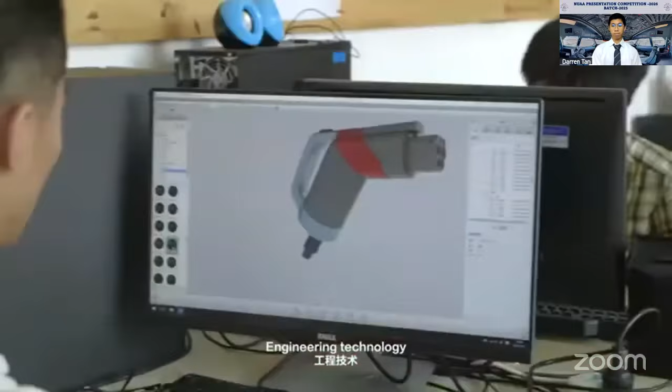NUAA is one of China's premier research-oriented comprehensive universities, which enjoys multiple disciplines in engineering technology, natural sciences, social sciences, business, and management. Established in 1952, NUAA strives to conduct world-level research and education with an emphasis on aerospace technology.

Our curriculum represents a strong capacity among all the universities in China. NUAA offers the widest range of programs of any university in China, with 54 undergraduate programs, 200 postgraduate programs, and 16 postdoctoral stations. With a total of 28,000 full-time students, we have a 2-to-1 ratio of undergraduate to postgraduate students.

With an annual research budget of $150 million US, our size and history allows a breadth of research activity that can be matched by few universities in China. We take a coordinated approach through our Research Institute to enable the best minds to work together on exciting new areas of study and discovery.

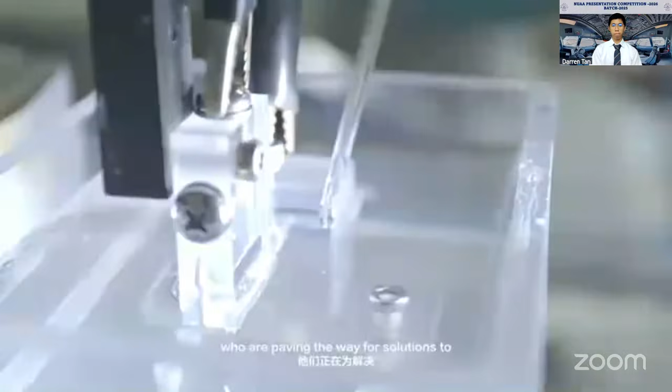Our faculty are comprised of teachers, researchers, and scientists who are paving the way for solutions to complex global issues impacting our environment, technology, and future.

NUAA has 2 campuses located 12 kilometers apart. Our Minggugong campus is situated in the very ruins of the Ming Dynasty Palace, and our Jiangning campus is located in a picturesque university town. Both campuses are easily connected by shuttle bus and metro.

NUAA first welcomed international students in 2005. 1,300 students from more than 90 countries are currently pursuing different degrees and non-degree programs at NUAA. Our alumni have gone on to work for different Fortune 500 companies in China and abroad.

5 undergraduate programs that are offered in English include aeronautical engineering, mechanical engineering, electronics and electrical engineering, software engineering and management, and international business. International students can choose various non-degree programs, including our Chinese language program, foundation program, summer innovation

projects, and joint research projects with Chinese students. Students at NUAA have access to all the world-class infrastructure one comes to expect from a premier university, including an extensive library and international student dormitory, health services at our hospital, a state-of-the-art sports center with a swimming pool, not to mention supermarkets, canteens, cafes, and much more.

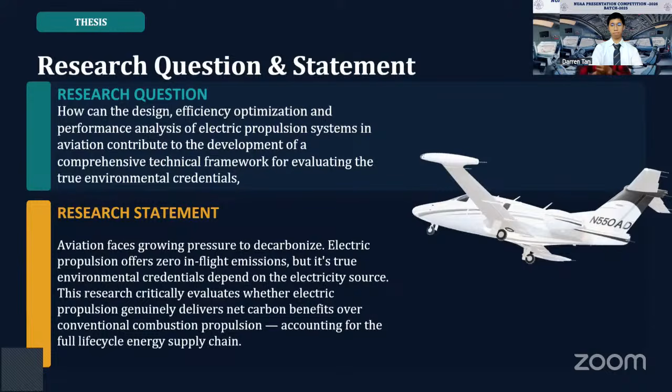Our research statement is: aviation faces growing pressure to decarbonize. Electric propulsion offers zero in-flight emissions, but its true environmental credentials depend on the electricity source. The research critically evaluates whether electric propulsion genuinely delivers net carbon benefits over conventional combustion propulsion, accounting for the full life cycle energy supply chain.

Next, we have the design of electric propulsion systems. We will go through the system architecture, motor and battery, thermal management, and safety certifications.

Next is the fundamentals of electric propulsion systems, that is, all-electric, hybrid-electric, and turbo-electric. Let me give a brief insight about how these three work.

We have three motor types: BLDC motor, PMSM motor, and induction motor. Each has efficiency of around 90 to 95%, 95 to 98%, and 85 to 92% respectively. The BLDC has medium power and the induction motor has moderate power, but the PMSM motor type has the highest power density. The BLDC motor is best used in small UAVs and light aircraft. The PMSM motor is for medium-large electric aircraft, and the induction motor is best used for cost-sensitive applications.

Next, we have core performance analysis, starting with range. We have calculated range on electric aircraft using a formula: battery energy multiplied by efficiency multiplied by the lift-to-drag ratio, divided by maximum takeoff weight. Next we have endurance.

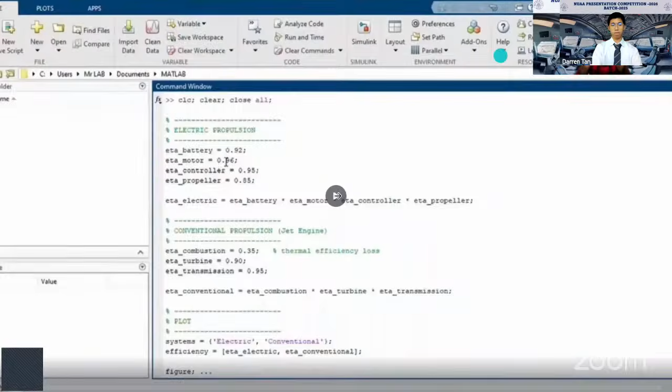Let's take the electrical propulsion. First, we model the electrical propulsion system, and each component represents a real energy conversion stage. Taking the battery as an example, before it can work, it converts chemical energy to electrical energy, losing around 0.08 of its energy, giving an efficiency of 0.92.

For the motor too, it converts electrical to mechanical energy, producing an efficiency of 0.96. The controller too has an efficiency of 0.95 because of power regulation losses. The propeller has an efficiency of 0.85 because it converts mechanical energy to thrust.

Now let's take the conventional propulsion too. The same thing happens during combustion. We have thermal efficiency losses which account for around 0.65, giving a combustion efficiency of around 0.35, a turbine efficiency of 0.9, and a transmission efficiency of 0.95. This formula is used to calculate the overall efficiency of each type of propulsion.

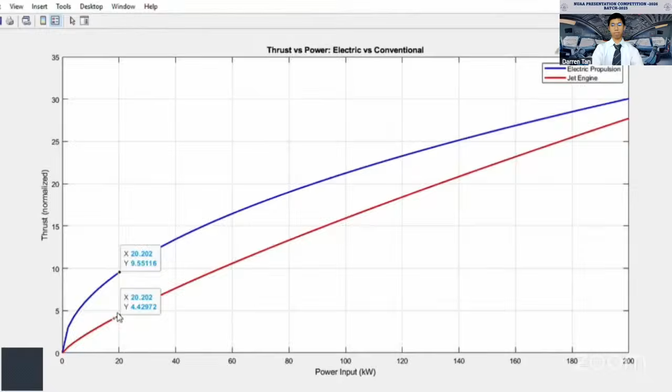This is our final simulation. Here we analyze the mission profile behavior of an electric aircraft. Our case study was the NASA X-57, and we compared it with the commercial or conventional traditional aircraft.

Unlike our previous simulation, which focused on efficiency of thrust, this model focuses on how propulsion systems behave across different flight phases. We define the time from 0 to 10 seconds, representing a simplified mission timeline where different flight phases occur at different time intervals. Let's run this code to see what we get.

All right, thank you. Now let's move forward to our efficiency analysis for our thesis. We have the total system efficiency formula: efficiency of the battery times efficiency of the controller times efficiency of the motor times efficiency of the propeller. So we have the following results.

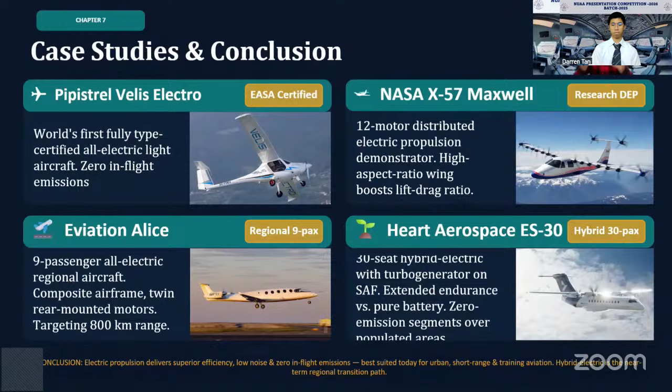So the conclusion is electric propulsion delivers superior efficiency, low noise and zero in-flight emissions. It is best suited for today's urban, short-range and training aviation. Hybrid electric is the near-term regional transition path.

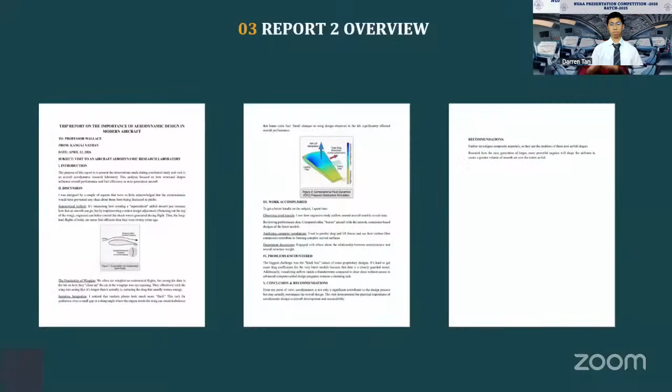Next, we have our second report. The topic of our second report was noise reduction and thrust optimization of electro-aerodynamic propulsion for silent drones. Here we have our report, made by another member. Next, we have another report. And now we have the academic essay that we wrote in collaboration. The topic was the role of education in personal and social development. Here we have our essay

and references. Next, we have the professional profiles for Group 12. Here we have the CV for our team leader. Next, the CV for our deputy team leader. And then we have the CVs for our members. Next is the professional profiles for Group 12, that is the cover letters.

So let me explain in brief how our team has been doing. Our team leader is more focused on strategy and the future, and one of our members is engineering focused. Another is performance driven, another is organized and thorough, another is analytical and detail oriented, another is analytical and curious, another is creative and collaborative. Here we have our cover letters for our different team members.

Okay, thank you. And now we have the questionnaire results that we did in the first few weeks of our course. This is the summary of our group. We took the help of AI to shape this illustrative analysis of our group questionnaire results. Now we have a miscellaneous overview of how our meeting minutes were prepared by our deputy team leader, and some social media portfolio. This is an example from one of our team members.

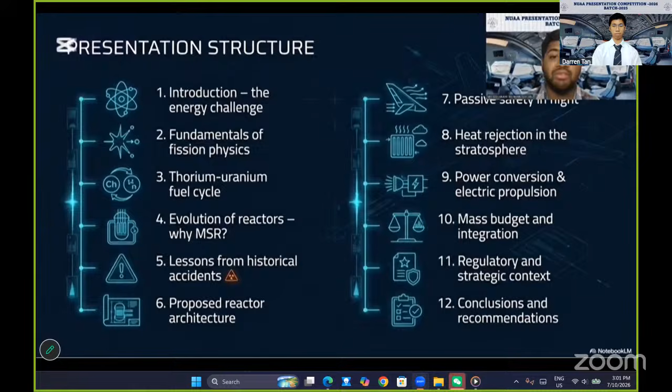Next, we will examine the evolution of reactor architecture and explain why the molten salt reactor is the only suitable solution. We will then present the lessons learned from historical nuclear accidents, a crucial part of our work because it shows which designs are dangerous and why. After that, we will present our proposed reactor architecture and discuss passive safety under flight dynamics. We will then cover power conversion and electric propulsion, present our mass budget and discuss the regulatory and the strategic context. Finally, we will conclude our findings and recommendations. Moving on to the next slide, the abstract.

The problem we address in our thesis is twofold. First, current solar battery systems fundamentally limit the endurance of HAPS platforms. They simply cannot provide the 20 to 100 kilowatts of continuous power required for advanced payloads like radar, communication, and electronic warfare systems.

Second, historical attempts to use solid fuel reactors in aerospace applications have proven catastrophically unsafe, as demonstrated by accidents like SL-1 and Cosmos 954. Our solution is the thorium molten salt reactor, which we establish as the only viable architecture to enable perpetual stratospheric flight. The TMSR addresses both the power and the safety challenges.

To achieve this, we designed the core as a 1 to 2 megawatt thermal single-fluid thermal spectrum reactor using the fuel salt. For safety, it features an inherent passive freeze plug gravity drain that activates within 2 to 5 minutes, along with strong negative reactivity coefficients that ensure stability under flight dynamics.

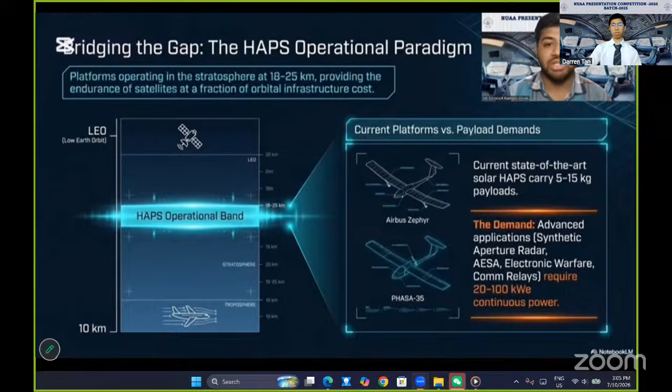These platforms are designed for long-duration missions lasting months or even years, and they provide regional coverage for applications such as communication, radar, electronic warfare, and reconnaissance. The strategic importance of HAPS is that they offer a persistent presence over a specific region, something that satellites cannot provide because they are constantly moving, and something that conventional UAVs cannot provide because they have limited endurance. Going on to the next slide, the stratospheric environment challenges.

However, the stratospheric environment is extremely challenging. At 20 km altitude, the air density is only 7% of the sea level value, just 0.09 kg per cubic meter. The temperature drops to minus 56 degrees Celsius, and the pressure is 5.4% of sea level pressure.

Stratospheric winds can reach speeds of up to 30 meters per second or more, requiring the platform to maintain its position against these winds, a task that requires continuous propulsive power. These extreme conditions mean any power source for a HAPS platform must be lightweight, reliable, and capable of providing continuous power under rigorous environmental conditions. Now, moving on to the next slide, the energy problem, limitations of photovoltaics.

Current HAPS platforms rely on solar power and batteries, but this system has fundamental limitations. First, the diurnal cycle: during the 12 to 14-hour stratospheric night, the platform must rely entirely on the batteries. For a 50 kilowatt platform, this means storing approximately 700 kilowatt hours of energy, requiring over 1,750 kilograms of batteries with current lithium sulfur technology.

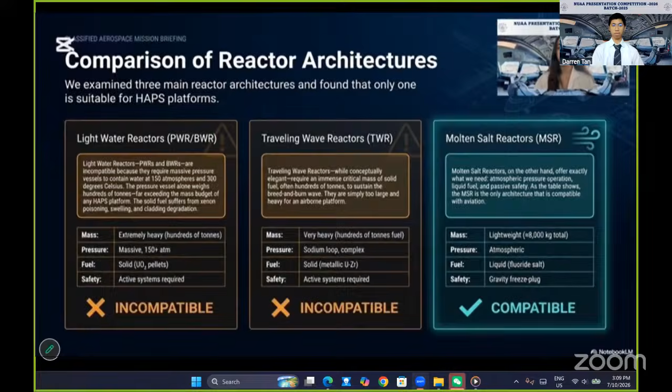Now let's move to the core chemistry, the thorium-uranium cycle. Thorium-232 breeds into thorium-233, then protactinium-233 with a 27-day half-life. Liquid fluoride salt operates at near atmospheric pressure and also allows continuous fission gas removal. Compared to the uranium-plutonium cycle, thorium produces far less long-lived waste, has lower proliferation risk, and enables predictable, autonomous control: cleaner, safer, and more secure.

Now let's move to the geopolitical field: proliferation resistance. Here's the game changer. Thorium burning inevitably produces uranium-232, which emits a hard 2.6 MeV gamma ray. To handle just 5 kilograms of uranium-233, you need 100 kilograms of lead shielding. That intense radiation makes the material impossible to hide, transport, or weaponize without massive remote equipment. It's self-protecting.

And remember from SL-1, a solid fuel reactor that killed 3 people when a single control rod was withdrawn. Solid control rods and pressurized water do not belong in the air. And now let's move to the lessons from history. History teaches us why liquid fuel matters. Goiânia, 1987: 93 grams of cesium-137 abandoned caused a radiological disaster.

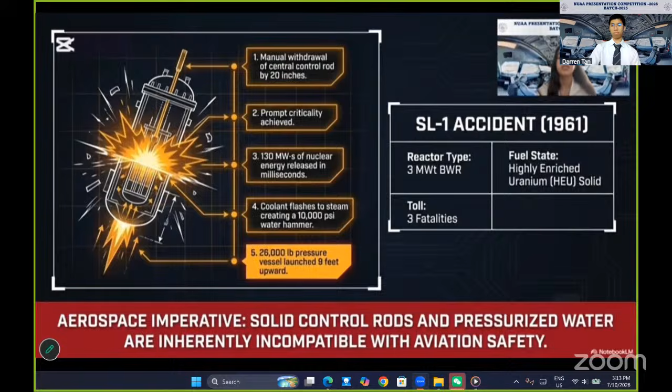And now let's move to the orphan source. 93 grams, that's all it took to create a crisis in Goiânia. If we put reactors in the sky, we must guarantee they cannot become orphan sources. Liquid fuel, chemically stabilized waste, and passive safety are not optional. They are mission critical. So the fission paradigm gives us unprecedented energy density, but only the molten salt reactor with its thorium fuel cycle delivers it safely, securely, and responsibly. Lightweight enough to fly, passive enough to trust, self-protecting enough to deploy anywhere.

For the reactor architecture, we propose a thermal power of 1 to 5 megawatts thermal. The salt is both fuel and carrier. The moderator is nuclear graphite, giving a thermal neutron spectrum, and the operating temperature is 600 to 700 degrees Celsius. We scale this from China's SM-TMSR 400 to our HAPS class reactor.

At this reduced scale, neutron leakage is significant: about 15 to 25% of neutrons leak out of the core. To compensate, we use a beryllium oxide reflector, a higher fissile loading of 10 to 20 kilograms of uranium-233, and an optimized core geometry. The core dimensions are approximately 1 to 1.5 meters in diameter and 1.5 to 2 meters in height. The core assembly mass is 3,000 to 5,000 kilograms.

A critical aspect of our design is passive safety. The MSR has a strong negative temperature coefficient of reactivity, typically -3 to -7 pcm per Kelvin. If the reactor heats up, the fuel salt expands, the fissile density decreases, and reactivity decreases, automatically self-regulating the power output. The safety arises from the physics, not from an active control system. The reactor is inherently stable.

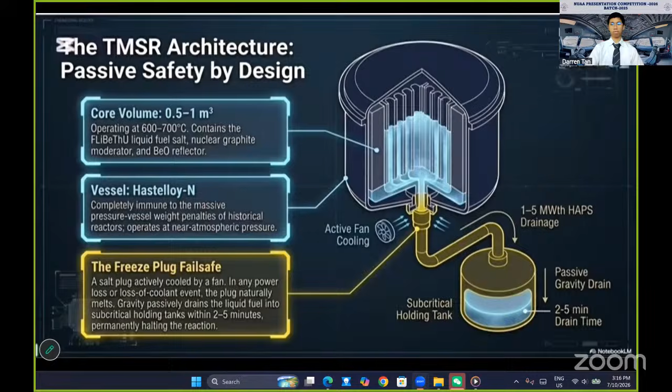A concern for any airborne reactor is how flight dynamics affect reactivity. Our analysis shows that climb and descent have only a small neutronic impact. Atmospheric gusts and turbulence could cause sloshing of the liquid fuel or flexure of the graphite moderator, but our analysis shows that reactivity perturbations are less than 1 pcm for typical gust loads.

In the case of accidents, during the first 5 minutes, the freeze plug melts, the salt drains to the tank, and decay heat is removed passively during descent. A multilayer honeycomb limits the kinetic energy of the impact. After the impact, the fuel salt solidifies below 460 degrees Celsius into a stable state.

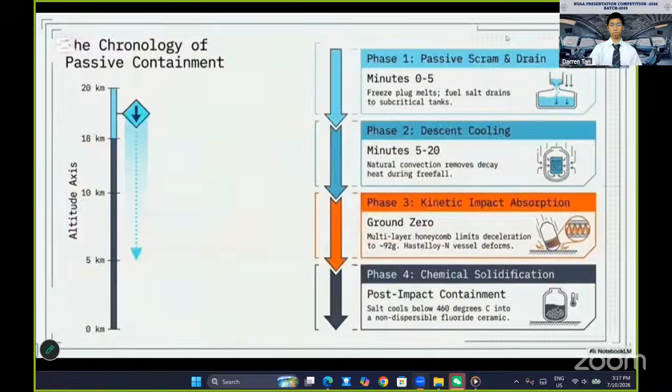Heat rejection at 20 km altitude presents a fundamental challenge. Air density is only 7% of its sea level value, which reduces convection heat transfer to just 15 to 20% of its sea level value.

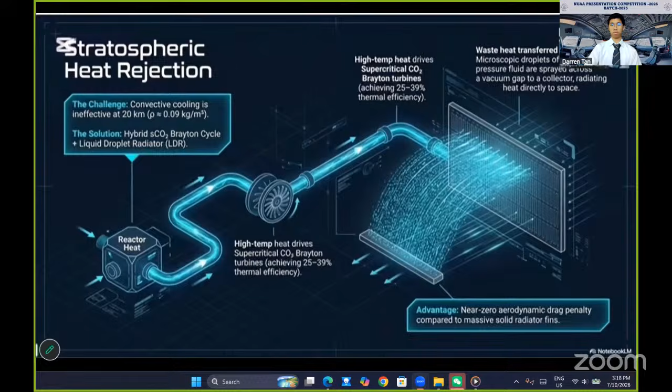The solution is the liquid droplet radiator. The working fluid is projected as a sheet of fine droplets that radiate heat directly to the cold sky with an effective temperature of 200 to 220 kelvins.

For power conversion, we selected the supercritical CO2 Brayton cycle. It operates with carbon dioxide above its critical point of 31.1 degrees Celsius and 7.38 megapascals. The efficiency is 25 to 39% at our operating temperature, and the turbomachine is extremely compact.

Our comprehensive mass budget gives a total system mass of approximately 8,210 kilograms. The reactor core is the dominant mass, accounting for 4,000 kilograms. The shadow shield is 1,200 kilograms. The CO2 power conversion system is 800 kilograms. The airframe reinforcement is 700 kilograms. The thermal management system is 500 kilograms.

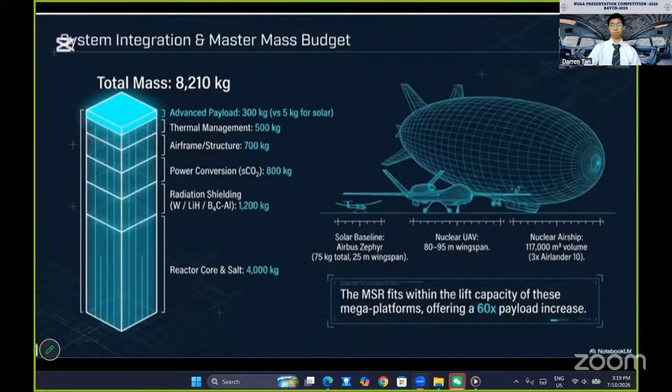The strategic context is very important. China's investment in thorium MSR technology exceeds 12 billion yuan, with an additional 45 billion yuan in industrial investments. The 2 megawatt thorium TMSR-LF1 in Gansu is the world's first operational thorium MSR. In November 2025, China achieved the world's first thorium to uranium nuclear fuel conversion. I would like to present a video about the thorium reactor.

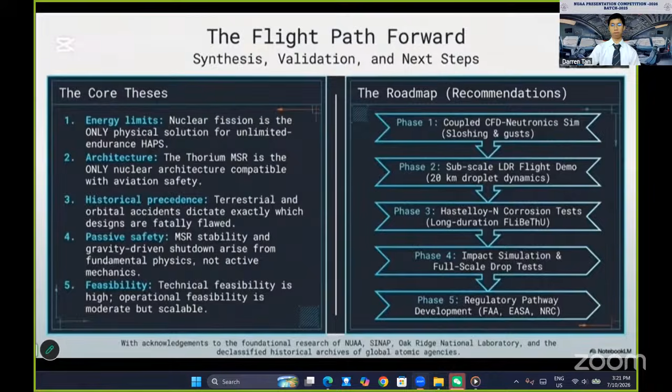Let me conclude by summarizing our main findings. Nuclear fission is the only physical solution to unlimited endurance HAPS. The thorium MSR is the only nuclear architecture compatible with aviation safety. Terrestrial and orbital accidents dictate exactly which designs are fatally flawed. MSR stability and gravity-driven shutdown arise from fundamental physics, not active mechanics. Technical feasibility is high, operational feasibility is moderate, but scalable.

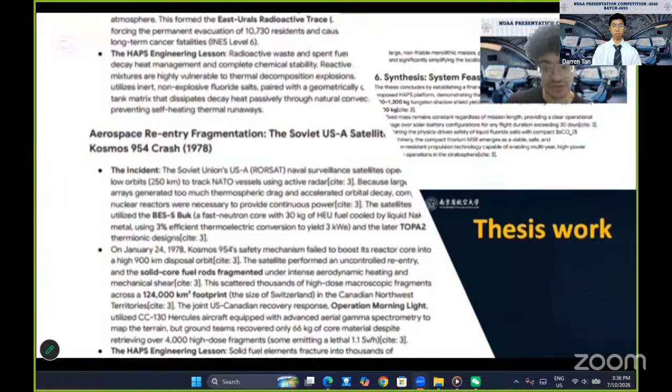An impressive exploration of a bold and innovative concept. Thank you to Group 13 for expanding our perspective on future aerospace technologies. To our judges, you may now begin your evaluation, and audience members, don't forget to vote if you enjoyed the presentation of Group 13.

Moving on, we are pleased to invite Group 14 with their thesis titled Impact of the Next Generation of Smart Suspension Systems for Automobiles. From improving passenger comfort to enhancing vehicle stability and safety, smart suspension technology is changing the way we experience road transportation. This research examines how these advanced systems could shape the future of automobiles, as innovation isn't only about speed, but also about being smarter, safer, and more comfortable journeys. Please give a warm welcome to Group 14.

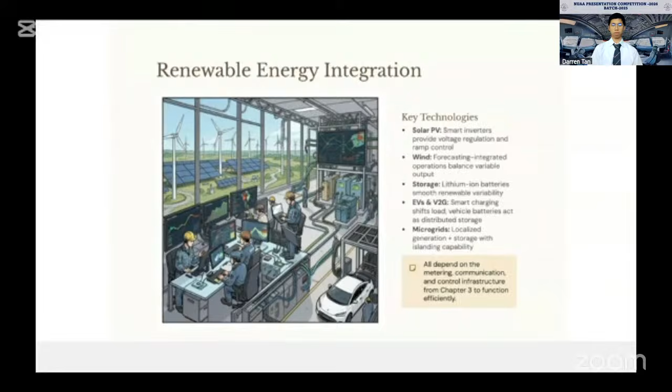Demand response programs can reduce peak electricity demand by approximately 15%. Smart grid projects may also reduce outage duration by around 32%.

Consumer benefits and engagement: smart grids give consumers more information and greater control over electricity use. Real-time data and flexible pricing can help users move their electricity consumption to cheaper off-peak hours.

Automated fault detection improves reliability and reduces the number and duration of power outages. Consumers can also monitor and manage their energy use through smart meters and connected applications. Smart grids also support rooftop solar energy, electric vehicle charging, demand response programs, and other modern energy systems.

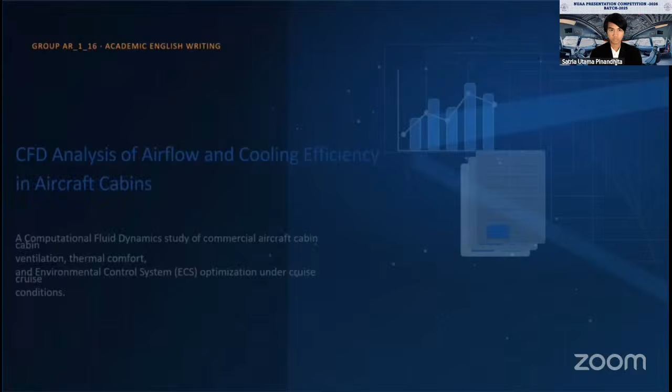Slide 66. Now we begin introducing our thesis, which is titled CFD Analysis of Airflow and Cooling Efficiency in Aircraft Cabins. This research studies how computational fluid dynamics can be used to improve aircraft cabin ventilation and passenger comfort. Slide 67 explains our research statement and research question. Our goal was to investigate airflow distribution, cooling efficiency, and thermal comfort inside aircraft cabins.

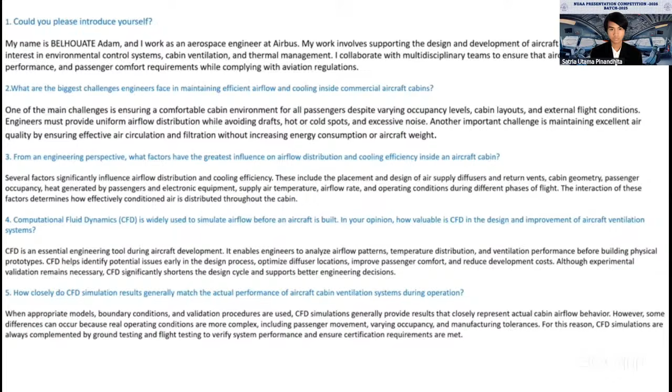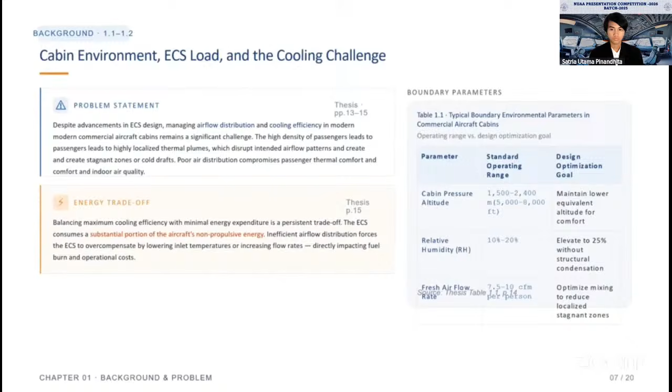Hello everyone, hello teacher. I'm Blessing from group 16 and I'm gonna present the thesis objective and scope. Our objective was to use CFD to model, evaluate, and optimize cabin airflow and cooling. We built a 3D cabin section with human mannequins as heat sources and simulated airflow and temperature under cruise conditions to find stagnant or uncomfortable zones. The scope was a twin-aisle cabin section, steady state, and incompressible, using RANS turbulence models, excluding taxi, takeoff, landing, and structural effects.

Our second part, we talk about thesis organization. Our thesis has seven chapters: introduction, literature review, theoretical background, methodology, simulation setup, results, and conclusion. Today's presentation focuses on chapters 1, 3, 4, and 5, the theory and methodology behind the simulation.

And here we're going to talk about the CFD foundation: governing equations. CFD numerically solves the equations governing fluid flow and heat transfer. Three conservation laws underpin it: mass, through the continuity equation; momentum, through the Navier-Stokes equations, which drive the simulation; and energy, which predicts the temperature field.

We assume steady, incompressible flow, use the Boussinesq approximation for buoyancy, and a no-slip condition at all walls. For our second, we talk about turbulence modeling. Since cabin airflow is turbulent, we use the RNG k-epsilon model, which outperforms standard k-epsilon in enclosed spaces. It solves for turbulent kinetic energy and dissipation rate, with 10% turbulence intensity at the inlet.

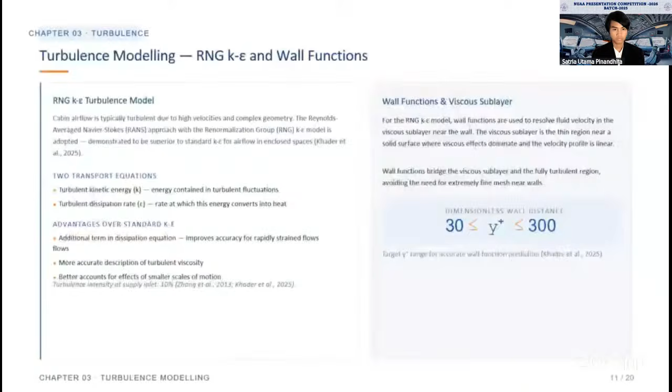Near walls, we use wall functions instead of an ultra-fine mesh, keeping y+ between 30 and 300. Boundary conditions: we define four boundary types. The velocity inlet at the ceiling diffuser, set to 2.6 meters per second and 10 liters per second per person. The pressure outlet at 1 atmosphere near the floor, avoiding longitudinal flow along the cabin that spreads contaminants row to row. And the walls are treated as smooth and no-slip across walls, seats, and passengers.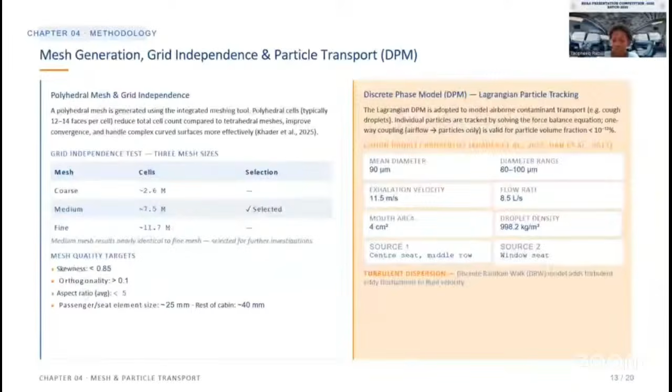For our last, we will talk about mesh generation and particle transport. We use a polyhedral mesh since it needs fewer cells, converges faster, and handles curved surfaces better than a tetrahedral mesh. A grid independence test compared coarse, medium, and fine meshes, and the medium mesh at 7.5 million cells matched the fine mesh and was selected. For contaminants, we use the discrete phase model to track droplets as individual particles, one-way coupled with the airflow, with turbulent dispersion added through the discrete random walk model.

Hello everyone, my name is Walid Mujkush, and I'm here on behalf of my group AR16 from NUAA. Today, I'll be presenting the results and conclusion from our CFD analysis of an aircraft cabin ventilation system. This study, conducted under the guidance of our Prof. Wallace, aims to quantify the performance of the current cabin design and lay the groundwork for future improvement. We'll cover the performance baseline established for airflow, temperature, and cooling efficiency, then move on to our key findings and recommendations for future engineering work.

To begin, we established a performance baseline for the current cabin design using steady-state CFD simulation with a medium mesh of 2.8 million cells. The pressure and turbulence analysis shows a stable airflow distribution. We have a pressure differential of 150 pascals to drive the flow, and turbulence intensity in the passenger zone is low and comfortable at 6.2%. Based on our findings, we have several practical recommendations for engineering teams. And now, we'll show you a video about our group AR16.

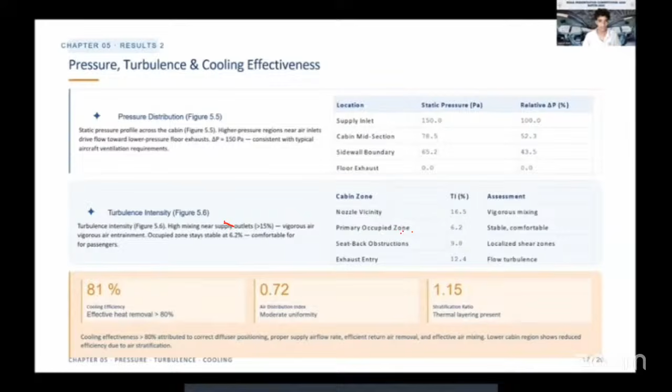I would like to express my sincere gratitude to our Professor Wallace for guiding us throughout this course. We learned many valuable skills such as writing well-structured reports, preparing professional cover letters, and improving our formal writing style. These lessons have strengthened our communication skills and will be very useful in our academic and future professional lives. Thank you for your patience, support, and encouragement. We truly appreciate everything you have taught us. A special thing about this course is that we were divided into groups. I was so happy working with my team; we were helping one another by giving feedback and supporting each other in our homework and improving our writing. So I'm so happy about this experience.

Now, the third slide presents the presentation outline. Our presentation is divided into a clear research flow. First, we will provide the introduction and background. Second, we will explain our aerodynamic modeling and system framework. Third, we will discuss the robust control law design strategy. Fourth, we will talk through the simulation and validation setup. Finally, we will analyze the performance results and summarize our conclusion, limitations, future work, and learning outcomes. This structure directly mirrors our thesis paper, ensuring a clear logical flow from problem identification to final validation.

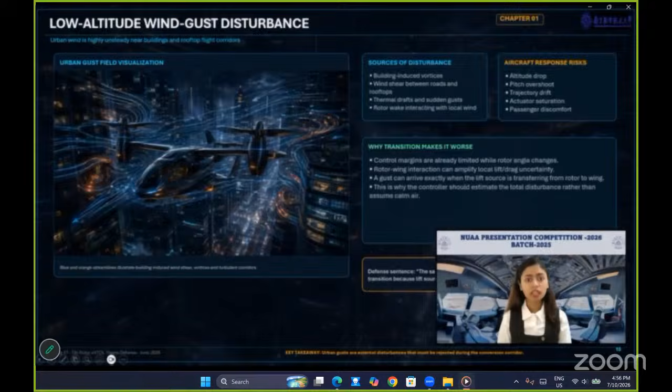Previous research has used several control methods for aircraft, such as PID, LQR, gain scheduling, sliding mode control, MPC, and H-infinity control. These methods are useful, but each has limitations. PID is simple, but it may not handle nonlinear transition well. Gain scheduling works at selected flight points, but transition changes continuously. MPC can handle constraints, but it may require more computation. H-infinity is robust, but it can become conservative.

The research gap is that tiltrotor transition flight needs a controller that can handle changing aerodynamics and estimate unknown disturbances in real time. This is why our thesis uses control allocation together with ADRC and LESO.

Now, let's talk about our research question, aim, and objectives. The main research question of our thesis is, how can ADRC and control allocation strategies improve transition flight stability and trajectory tracking performance of tiltrotor eVTOL aircraft under wind gust disturbances? Our main aim is to develop a model-based robust control framework for transition flight.

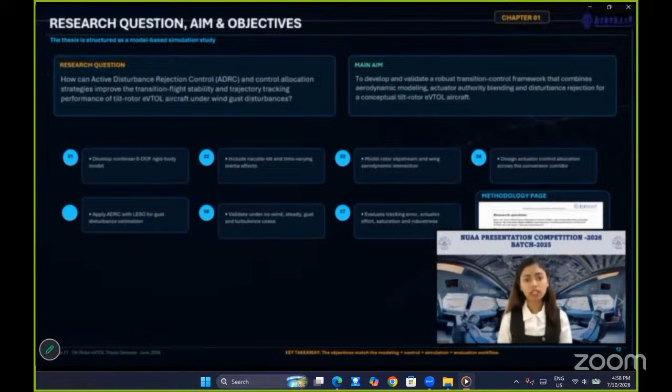The objectives are to build a nonlinear six-DOF aircraft model, to include nacelle tilt and time-varying inertia effects, to model rotor slipstream and wing interaction, to design control allocation across hover, transition, and cruise, to apply ADRC with LESO for disturbance estimation, and to validate the model in MATLAB or Simulink under different wind scenarios.

This is how our aircraft will look like if we work on our thesis. If we can collaborate with our university, this is how our aircraft will look like. So, let's move to the next part, our research methodology.

This slide shows the research workflow. First, we reviewed previous studies on tilt-rotor aircraft, transition aerodynamics, and control methods. Second, we developed the 6-DOF flight dynamics model. Third, we modeled our rotor slipstream and rotor-wing aerodynamics coupling. Fourth, we designed the control allocation and ADRC-based control law.

Fifth, we tested the complete system in MATLAB or Simulink under 4 wind cases, like no wind, steady wind, gust wind, and turbulence wind. Finally, we evaluated the system using trajectory tracking error, control effort, actuator saturation, and the robustness. This completes the introduction part.

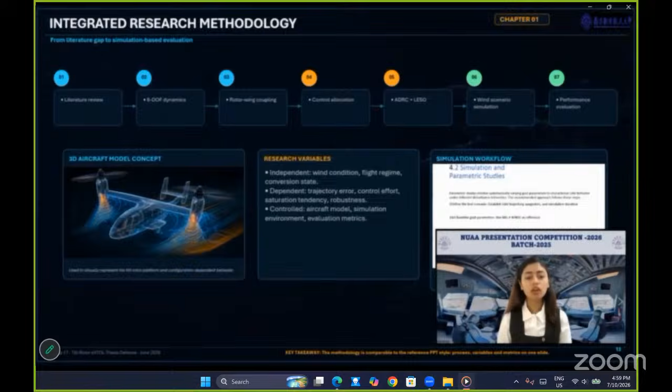This chapter is a technical foundation of our thesis before designing any controller. We must first understand how the aircraft moves and how we can act on it. And our modeling section includes coordinate system, 6 degree of freedom motion, Newton-Euler equations, time-varying inertia, rotor slipstreams, rotor wash, and lift variation.

And then coordinate system of 6 degree of freedom motion. A tilt-rotor eVTOL aircraft moves in 3-dimensional space, therefore we use a 6 degree of freedom model. The 3 translational motions are surge, sway, and heave. Surge means forward and backward motion, sway means the sideways motion, and heave means the vertical motion. The 3 rotational motions are roll, pitch, and yaw.

These degrees of motion are most important because wind gust can affect not only the altitude but also pitch, roll, yaw, and the path direction. This coordinate system helps us to describe the motion correctly. The inertial frame describes the position, the body frame describes the force and motion, and the wind frame describes the aerodynamic coefficients.

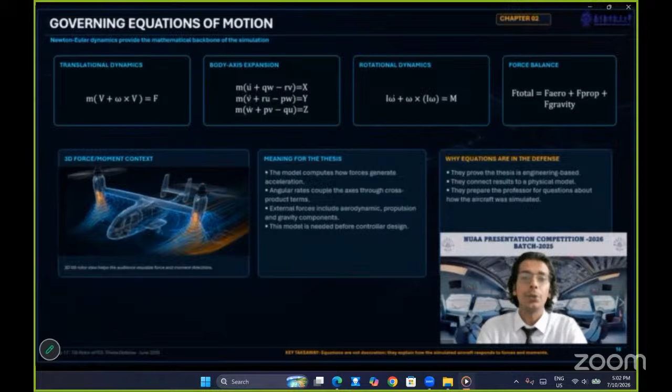In many simple aircraft models, inertia is assumed constant. But in the tilt-rotor aircraft, the assumption is not fully accurate because the nacelle rotates during the transitions. When the nacelle moves from vertical to horizontal, the mass distribution changes the inertia tensor. The extra inertia terms in the equation represent the effect of changing configurations during the nacelle rotations. This makes the model more realistic, especially during fast transition or maneuvering.

This method is suitable for preliminary simulation because it is simple and computationally light, but it still captures the main effect of the rotor-generated airflow. The rotor slipstream is important because it can pass over the wing and change the local airflow. And rotor wash effect on wing lift.

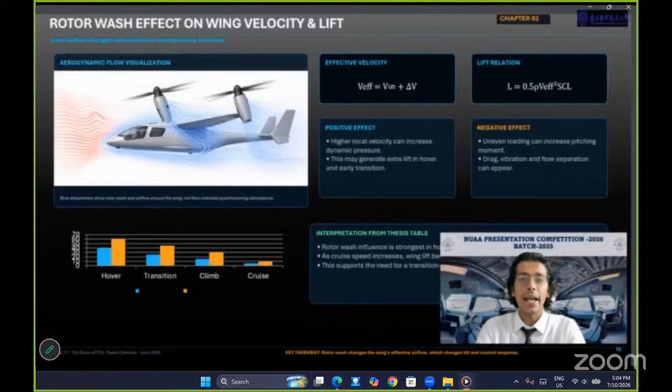The rotor wash can increase the lift during hover and early transition, but it can also cause uneven wing loading, drag increase, flow separation, and vibration.

Lift, drag, and polar variation. During transition, lift and drag coefficients are not fixed. Rotor-induced airflow changes the effective lift coefficient, and drag changes because drag is related to the lift and airflow conditions. In the middle of the transition, drag can increase and the power requirement may become higher. This means the aircraft's aerodynamic behavior can change throughout the conversion corridor. Therefore, the controller must be robust enough to handle changing aerodynamic conditions.

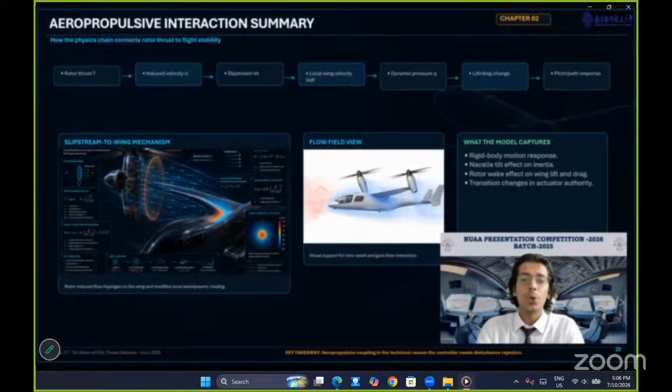Now I would like to invite the next speaker, Gustav Kuao, to present the first part of chapter 3, control law design strategy.

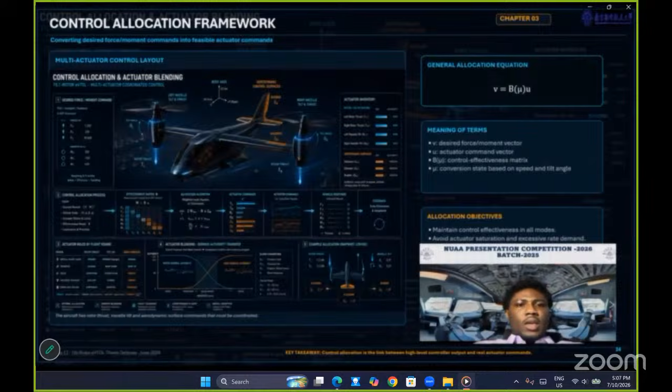In this chapter, we explain how the aircraft decides which control parts should work differently during different stages of flight. Since the aircraft changes from hovering to forward flight, the control system needs to change very smoothly as well. If you look at slide 24 of control allocation framework, this slide explains the main idea of control allocation. The aircraft has different control parts, such as the rotors and the control surfaces. Instead of using only one part, the system decides how much each part should work. This helps the aircraft stay stable and balanced while using the available controls in its very best way.

Now in slide 25, we will talk about actuator mixing across different flight modes. During hover, the aircraft mainly depends on the rotors for control. During cruise flight, the control surfaces become more important. In the transition, both systems work together instead of changing suddenly from one system to another. The control is shared smoothly. This reduces sudden movement and helps keep the aircraft very stable.

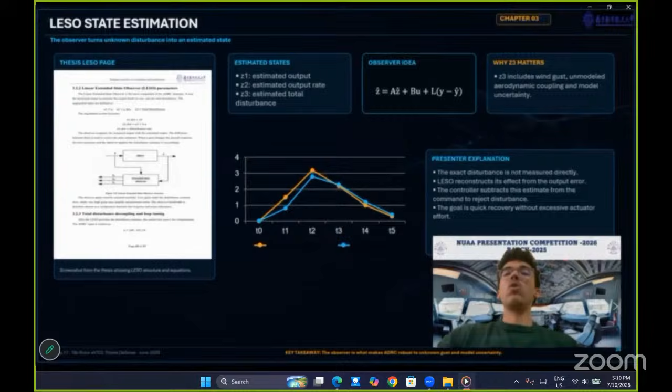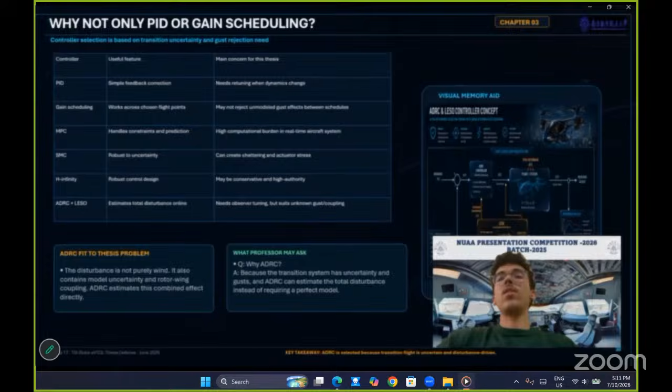The next slide answers an important question: why do we need ADRC? We know that PID is simple, but it might need retuning when aircraft dynamics change. Gain scheduling can work at selected flight points, but transition flight changes continuously. MPC can handle constraints, but it might require heavier computation. So ADRC is useful because it can estimate unknown disturbances in real time. For our case, ADRC is suitable because the aircraft faces wind gusts, nonlinear aerodynamics, and model uncertainty during transition.

Now we're going to move from control design to simulation and validation. After building the model and controller, we need to test whether the system works under different wind conditions. The purpose of the simulation is to evaluate trajectory tracking, control effort, saturation behavior, and flight envelope robustness. This is where our theoretical model becomes measurable simulation evidence.

Fourth, ADRC and LESO are added to the control loop. Fifth, wind scenarios are applied. Sixth, the simulation is run in MATLAB and Simulink. And finally, the results are evaluated. This workflow makes the simulation organized and repeatable.

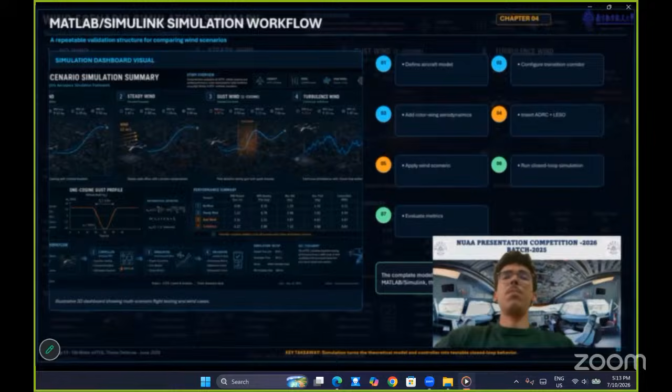Four wind scenarios are considered. The first is no wind, which is the baseline case. The second is steady wind, which gives a constant disturbance. The third is gust wind, which gives a sudden temporary disturbance. The fourth is turbulence wind, which gives random and continuous disturbance. By testing all four cases, we can evaluate the controller under both ideal and difficult conditions. This makes the validation stronger than only testing the aircraft in calm air.

The gust input is based on the MIL-F-8785C one-cosine gust model. This is the name of a model used. This gust starts smoothly, rises to a peak, and then returns smoothly. It is useful because it gives a standard and repeatable disturbance input. This allows us to compare the aircraft's response fairly. The main purpose is to check how quickly and smoothly the aircraft can recover after a gust enters during transition.

Now I would like to invite Omeima to present the performance evaluation and simulation results.

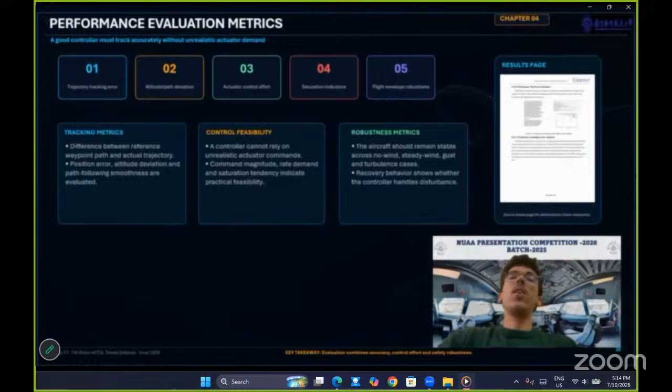Thank you, everyone. Thank you, Hajjaj. Good afternoon. I'm Umayma and I will present the results and the performance evaluation.

The control is evaluated using several metrics. The first metric is trajectory tracking error, which shows how far the aircraft moves away from the desired path. The second is altitude deviation, which is very important because altitude loss during transition can be dangerous. The third is control effort, which shows how much actuator command is needed. The fourth is actuator saturation, which checks whether the actuator commands are realistic. A good controller shouldn't only track the path, it should also avoid excessive actuator movement.

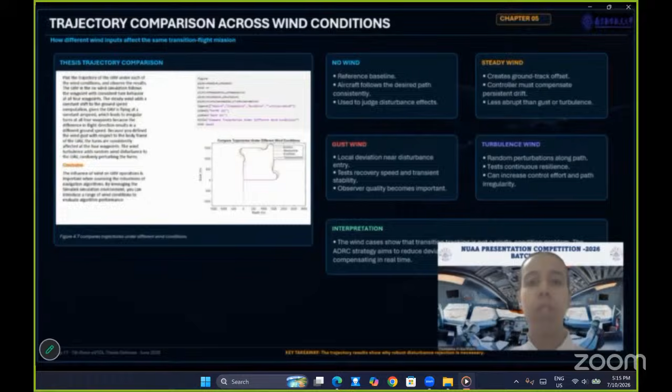This slide compares the trajectory in different wind scenarios. In the no wind case, the aircraft followed the desired path more smoothly. In steady wind, the path shifts because wind affects the ground track. In gust wind, the aircraft experiences local deviation because the disturbance enters suddenly. In turbulence wind, the trajectory becomes more irregular because the disturbance is random and continuous. This comparison shows that wind has a strong effect on trajectory tracking.

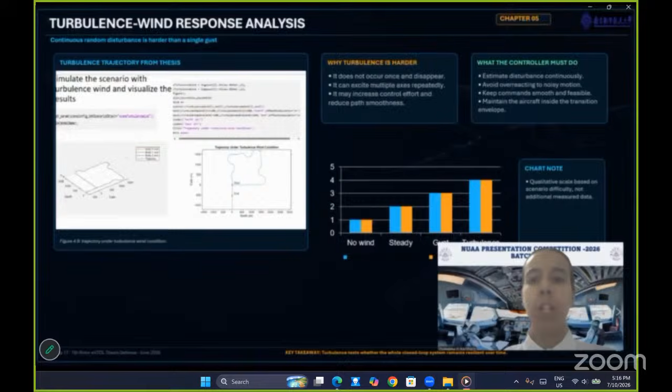Turbulence is more difficult than a single gust. A gust is temporary, but turbulence continues. Over time, it can disturb the aircraft again and again. It can affect altitude, pitch, roll, yaw, and path direction. Because of this, the control must continuously estimate and compensate for the turbulence. These tests show whether the control framework is robust under more realistic and difficult wind conditions.

Now we move to the final chapter: conclusion, prospects, and assumptions. This section explains what we found, what limitations we had, and how this work can be improved in the future. A good thesis shouldn't only show results, it should also clearly explain the scope and boundary of the research.

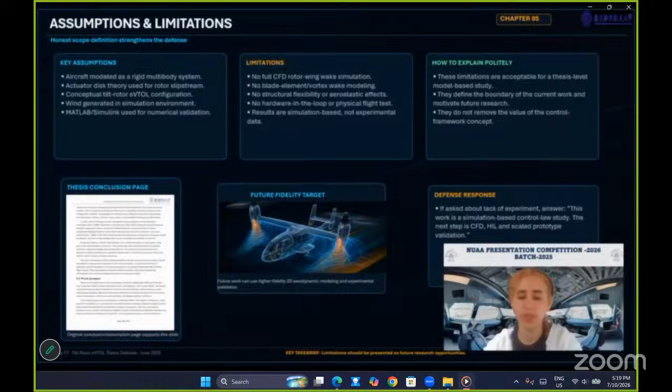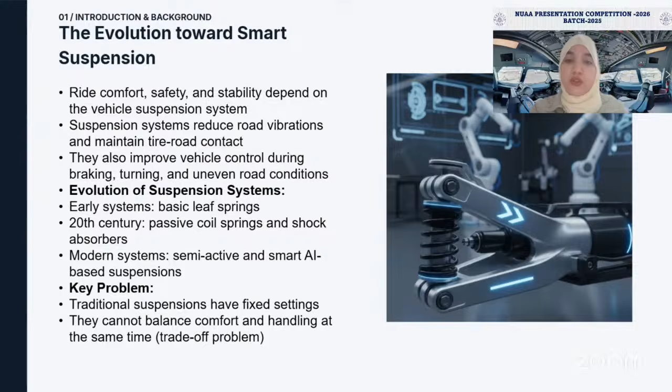Smart suspensions use sensors. They collect information. Computers control the system in real time. They solve the comfort-handling problem. There are two types. Semi-active: adjusts damping, uses little power. Fully active: creates its own force, best performance, more energy.

To summarize, smart suspensions are the future. They achieve both comfort and control at the same time. Traditional suspensions cannot do this. Soon, smart suspension will be in all cars, not just luxury cars.

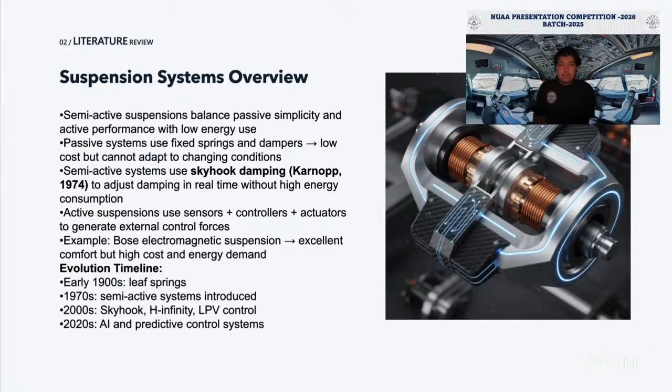This progression is accelerating. Active suspensions generate external forces through actuators. Sensors monitor body acceleration and suspension movement. The controller calculates responses, actuators generate corrective forces. Bose developed electromagnetic suspension with exceptional ride comfort, but energy requirements and costs limit widespread adoption.

The literature conclusion is clear. Passive dominates the budget segment, but is inherently limited. Semi-active provides the best compromise between affordability and performance. Active remains the benchmark for maximum performance. Goodall, Karnopp, and Bose all agree real-world applications are already here.

Cadillac uses magnetic ride control with magnetorheological fluid. Mercedes-Benz has active body control and Audi has adaptive air suspension. BMW uses adaptive drive. Smart suspension is transitioning from luxury to mainstream. Future directions are exciting. Bose's electromagnetic suspension shows promise.

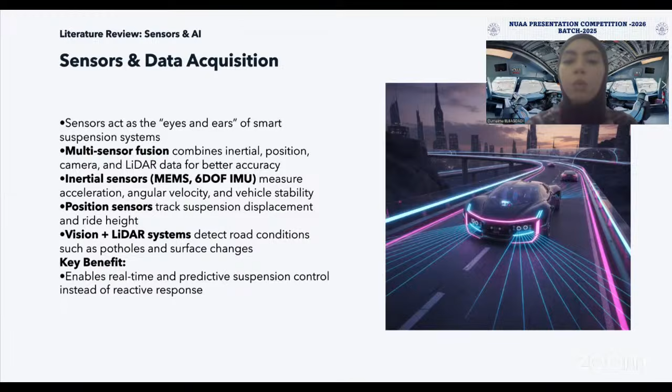Benefits include proactive adjustment, mitigating time delays, and building the foundation for autonomous vehicle integration. Now let's discuss control algorithms. From PID to reinforcement learning, AI-driven algorithms are transforming suspension performance.

PID control is the foundation. It generates forces based on error between desired and actual states. The proportional, integral and derivative terms address different response aspects. PID is effective for low frequency chassis control below 1 Hz. Studies show a 5.37% reduction in vertical acceleration on flat roads.

Machine learning approaches push further. Deep learning uses CNNs for road condition recognition. TD3 reinforcement learning enables autonomous PID tuning, cooperative control with steering and braking, hierarchical control, and ADAS compatibility.

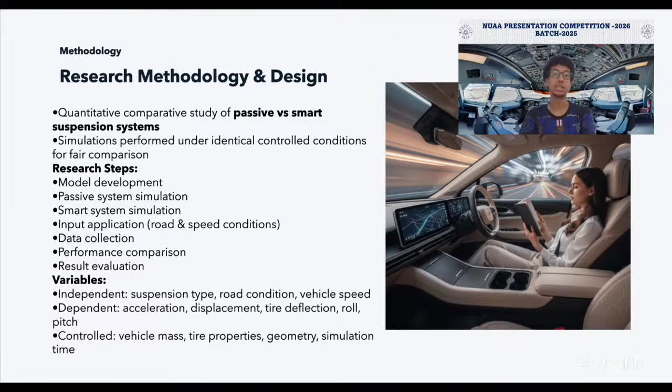Performance criteria. Ride comfort uses RMS vertical acceleration per ISO 2631. Stability uses body roll, pitch, and suspension travel. Road handling uses tire deflection and dynamic tire load. Improvement is calculated as passive minus smart divided by passive times 100%.

We use MATLAB and Simulink with a 2DOF car model. This standard approach captures essential dynamics while being computationally efficient. The passive model uses spring and damper elements with fixed properties. The smart model adds sensors, ECU, actuators, and a PID controller that continuously monitors and adjusts.

It captures key dynamics. To summarize, we designed a rigorous, standards-based quantitative comparison using well-established simulation tools to systematically evaluate performance differences. Thank you. I'll hand it over to Stephen for results.

Hello everyone, my name is Steven, I'm from the Republic of Congo and I am an aeronautical engineering student at Nanjing University of Aeronautics and Astronautics. I'm currently taking the academic writing course for our thesis project, Next Generation of Smart Suspension System for Automobiles. I serve as the deputy team leader. In this role, I help coordinate the project, support communication among team members and ensure that our research progresses efficiently.

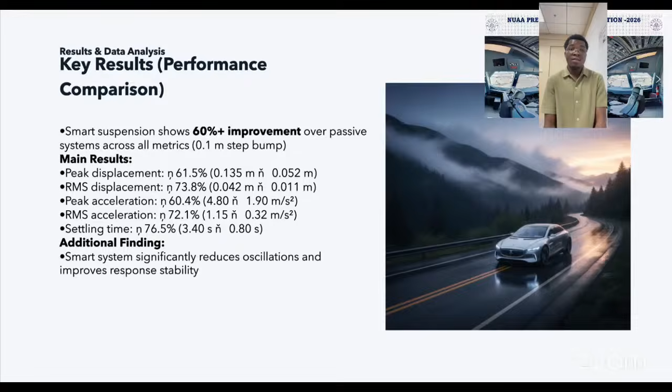I'm responsible for the results section of the project. My duties include conducting simulations and analyzing the collected data to evaluate the performance of the smart suspension system. I generate graphs, tables, and all the visualizations to present the results clearly and effectively. I also compare the performance of the smart suspension system with the conventional suspension system using objective performance indicators such as ride comfort, vehicle stability, and vibration reduction.

In addition, I perform statistical analysis to ensure that our findings are accurate, reliable, and supported by evidence. The deliverables of my work include the results chapter, charts and figures illustrating system performance, detailed performance comparisons, and a comprehensive statistical analysis that highlights the effectiveness of smart suspension technology.

Through this project, our team aims to contribute to the development of next generation intelligent suspension systems that improve vehicle safety, ride comfort, and overall driving performance. Thank you for your attention, and I'm looking forward to presenting our research.

Thank you. In summary, max chassis displacement reduced 61.5%, RMS displacement improved 73.8%, peak acceleration reduced 60.4%, RMS acceleration improved 72.1%, and settling time improved 76.5%. Our core conclusion is that smart suspension uses real-time sensing to achieve both comfort and control simultaneously. They don't trade one for the other. This is a fundamental breakthrough.

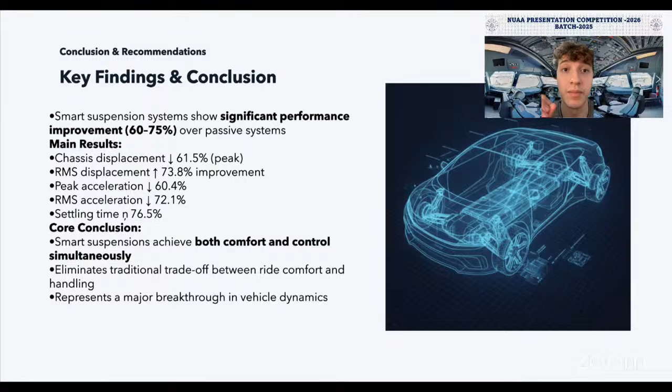Our limitations are the idealized actuator model, single disturbance, PID control only, and full validation pending. This suggests future work. Our future research is stochastic road profiles per ISO 8608, multiple speeds and control strategies, hardware-in-the-loop validation, and physical prototype testing.

Our final statement: smart suspension technologies provide measurable, significant improvement, supporting transition from luxury feature to mainstream standard. In conclusion, our research validates that smart suspension systems represent the future. 60 to 75% improvement across all metrics demonstrates that intelligent, adaptive suspensions overcome limitations that plagued vehicle design for over a century.

As sensors become cheaper and AI more sophisticated, smart suspension will become a standard on all vehicles, improving safety, comfort, and also performance for everyone.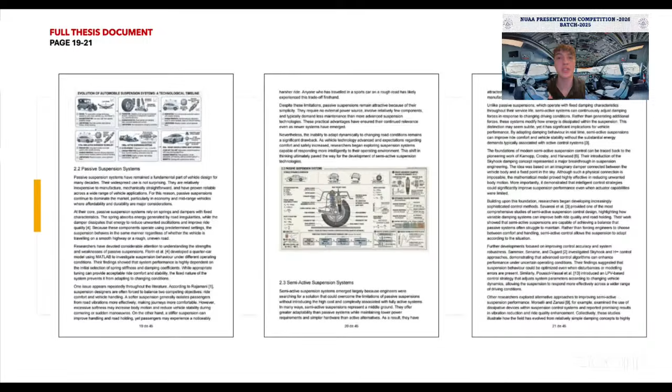In this thesis, we have an introduction showing the background of automobiles, suspension systems, going a bit into the problems of conventional suspension, also the importance of the ride, like comfort, safety, and vehicle stability. We also introduce the smart suspension system. Then we have the literature review, the conventional and also the smart suspension system.

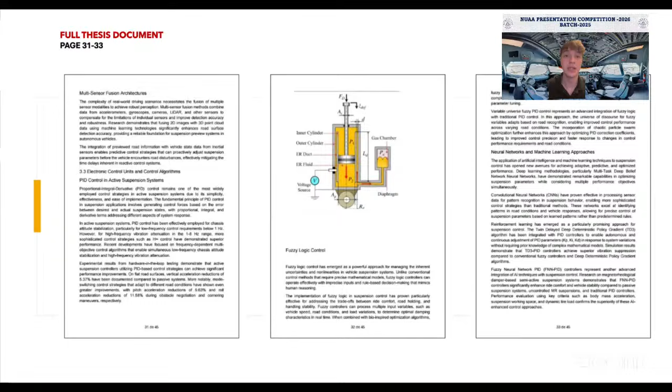Comparing both systems, we had the sensor and control systems and AI, introducing the smart suspension technologies, the sensors of a smart suspension system, electronic control algorithms, a bit of Industry 4.0 and intelligent systems, our methodology, our results of data, and also a conclusion.

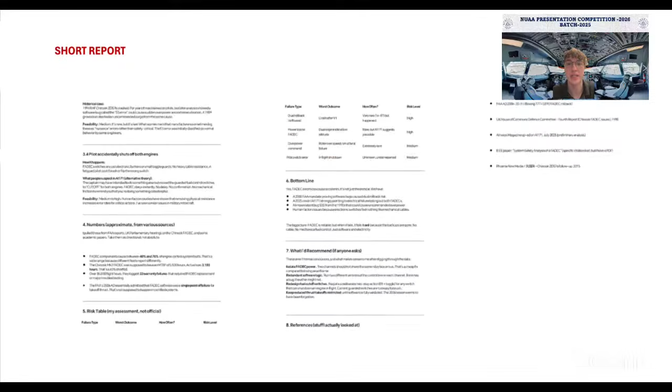Now, I will briefly introduce the different types of reports we study in this course, as you can see in these slides. First, we go through feasibility reports, which evaluate whether a project idea is practical and worth doing. Also, the progress report, which shows the current status of a project, what's been completed so far.

Incident report, which records unexpected events, what happened and how they were handled. The investigative report, which is used to analyze a problem in detail and present findings based on evidence. These report types help improve our ability to organize information clearly and communicate professionally.

Finally, through all these tasks, we develop important learning outcomes, including improved academic writing, better research skills, stronger teamwork, and clearer communication in English. We have a short video for you.